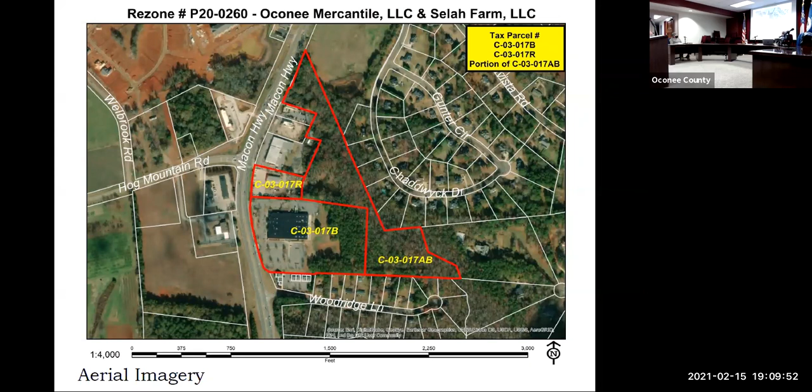Thank you, Mr. Chairman, Commissioners. Your first case this evening is Rezone P20-0260, Oconee Mercantile LLC, Selah Farm LLC. This is located just north of the city of Watkinsville, along 441. This is the aerial that shows the location of the three parcels that are part of the rezone for this evening. You'll notice it's adjacent to Hog Mountain and Macon Highway. It's currently zoned OBP, industrial, and OBP and industrial.

This is the future land use map showing the surrounding land use categories: civic center, in which the majority of this property lies, country estates, and suburban neighborhood. Again, the rezone is to rezone the property from OBP, Office Business Park District, and Industrial District to B2, to construct a multi-use commercial development consisting of retail shops, restaurants, and office space.

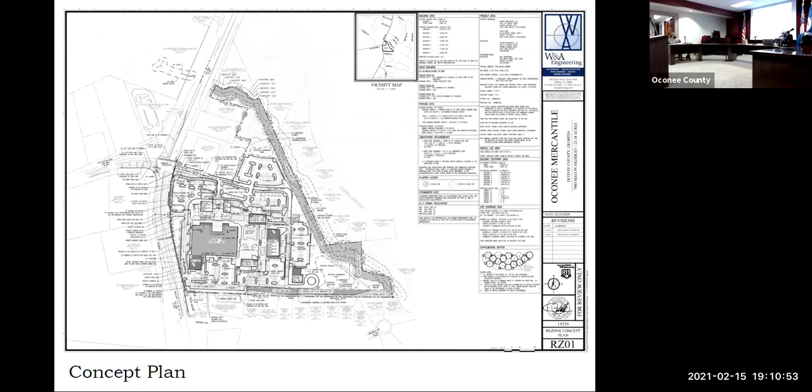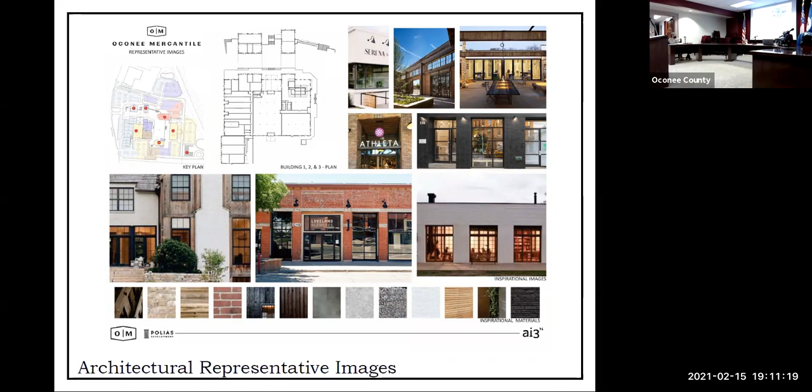A companion rezone, P20-0261, and special use 0263, are requested to allow the existing stone store to relocate to a nearby parcel. You have this concept plan in your packets, showing the overall development on those three parcels. This is a zoomed in slide as well, showing the main building that's existing, future buildings, and the relocation or removal of the stone store, which is located at this location. Again, you have the architectural representative images that have been forwarded to you and posted for the proposed project.

And staff recommends conditional approval of the rezone with the following conditions. 1, 2, and 3 are our standard conditions. We'll jump down to number 4: in order to facilitate pedestrian connectivity with future commercial development, a sidewalk shall be installed in the right-of-way along the subject property's frontage between parcel C03M002 and C03017AB. Number 5, total building square footage on the site shall not exceed 162,508 square feet. Number 6, no delivery truck shall operate on the site, nor dumpster pickup or emptying occur, between the hours of 11 p.m. and 7 a.m. on any day of the week.

Number 7, along the rear property line abutting residential use, all parking areas and drive aisles shall be screened from view by a 10-foot wide planted landscape buffer. Said buffers shall be planted at grade with the parking lot and drive aisles in order to create an opaque screen year-round and shall be 6 feet tall at the time of planting. Number 8, the lift station at the rear of the property shall be screened by an opaque fence and evergreen vegetative screen, to be 6 feet tall at the time of planting.

Thanks, sir. Thank you, guys. Now we'll hear from the petitioner or petitioner's representative.

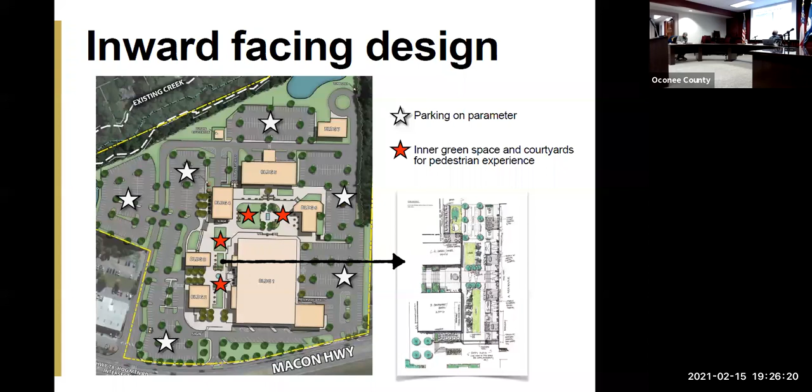Good evening. My name is Scott Haynes. I work for W&A Engineering, and I reside at 2081 Clotfelter Road, Bogart, Georgia, in the county. I wanted to talk a little bit about what's going on there today.

Some of the things that can go on in industrial property are things like carpentry shops and pretty much any type of manufacturing or fabrication work, whether it be metal, wood, or concrete plants, industrial laundry facilities, solid waste collection facilities, things like MRF sites. These things can not only have visual impacts, but they can have noise and smell associated with them. So it's understandable that uses like that, especially for a blanket zoning, should carry a 100-foot buffer.

But that's not the case with what we're proposing. What we're proposing is very specific and is very amenable to residential housing, being that they are amenities that residents will use instead of just live next to. For that reason, we believe the 50-foot buffer and additional screening, as staff has mentioned, is appropriate.

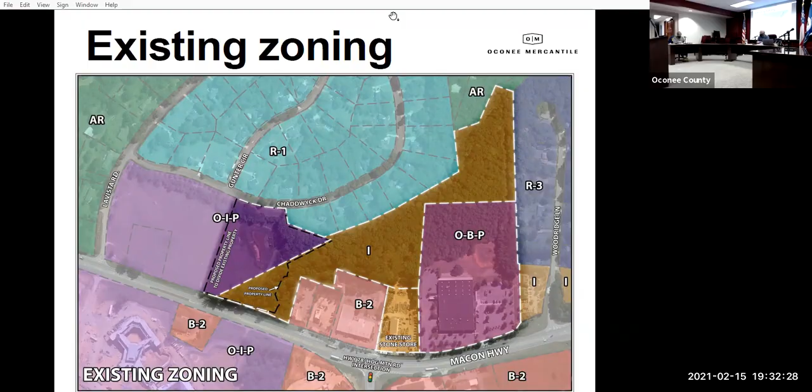All right, that concludes the time we have available for speakers in favor of the proposal. Now, signed up to speak in opposition, first we have Bill Hale. Mr. Hale, will you come up please? Tell us who you are and where you live.

Good evening. I am Bill Hale. I live at 1140 Chaddwyck Drive in Athens. I am the president of the Chaddwyck HOA as well.

I'm going to be speaking tonight on this particular aspect of the rezone. I know there are other neighbors of ours who are going to be speaking on the relocation of the Stone Store at the appropriate time. And I want to reiterate at the beginning that we are not opposed to the project as it is being proposed on 441, at the top of the development.

Because this project—and we are down a hill from this project—we're not opposing what Mr. Mulkey is proposing to put on 441. Our concerns, our opposition to this project, are a result of the very rear of the project and his use of that property, which Mr. Haynes and Mr. Mulkey both talked about as being currently zoned industrial. It's a unique situation here.

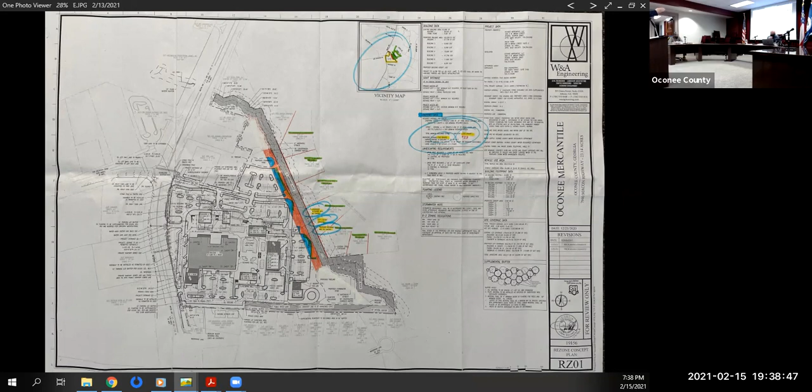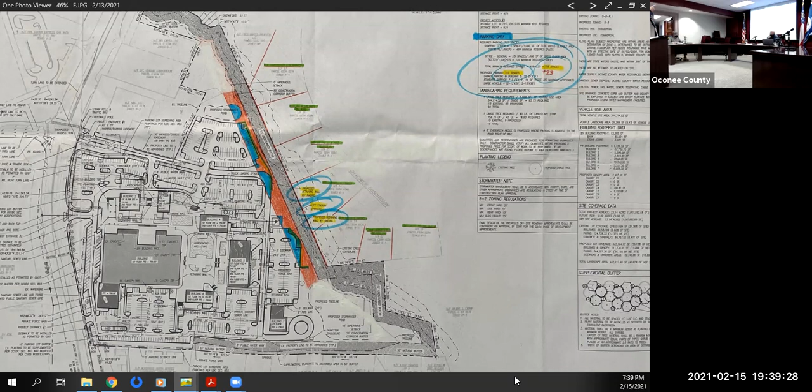Where the 50 feet shaded gray area is—that's the 50-foot proposed buffer that they're talking about. What is in red there is what an extra 50 feet would be. The combined gray and red show what currently exists as a 100-foot buffer. And you can see what is inside that red portion: small corners of parking lots, a small portion of the proposed stormwater pond up at the top, and some drive aisles and retaining walls. There are no buildings—just parking, drive aisles, retaining walls, and small portions of stormwater ponds. That's it.

Even the impact on us with the development of this project to that 100-foot buffer is going to be devastating. I understand there's some benefit to the county for this project being developed, especially up on 441. The reduction of that buffer from 100 feet to 50 feet would be more than devastating—it would be catastrophic for our lives, our quality of life, and our homes back there, especially because of the unique topography and elevation of these sites.

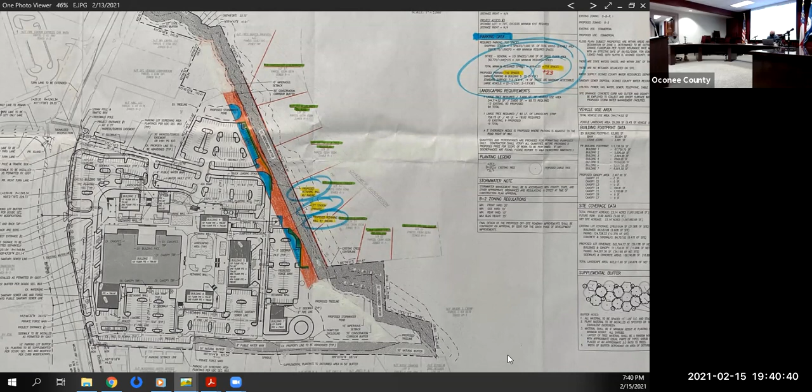So let's zoom in a little closer on this with our exhibit C, I believe, Alex.

If you zoom in even closer, that again shows what we're talking about: a few parking spaces, the corner of a drive aisle, retaining walls. That's what we're talking about. That's it.

The impact on us is tremendous. The impact on the developer to make minor adjustments to this, I do not believe is going to prevent this project from being a very successful project.

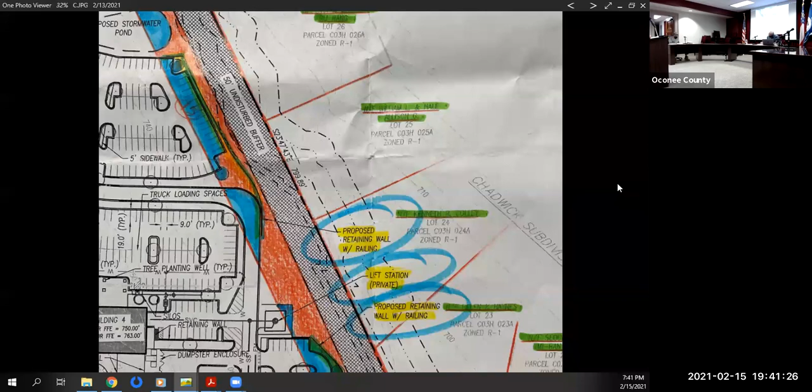Can we go to exhibit D, Alex? This shows the closest buildings, highlighted in yellow on this screen, that are going to be closest to us. The buildings in front of that are buildings that currently exist, like building one, shaded in gray, which is the current Oconee State Bank Operations Center.

Next to it, up at the top, is where the current Stone Store is. I believe the proposal calls for tearing down the existing Stone Store and building the two buildings labeled Building 2 and Building 3 back to back on the Stone Store site. But what you see in this exhibit is a lot of parking, parking that sprawls throughout this development, and that's what is coming back to within 50 feet of our property lines.

The parking on this map is even more than what is required by the Oconee Code. The requirement, according to the planning department, is 719 spaces. This proposal has 742 spaces, which is 23 more than the minimum required by the county.

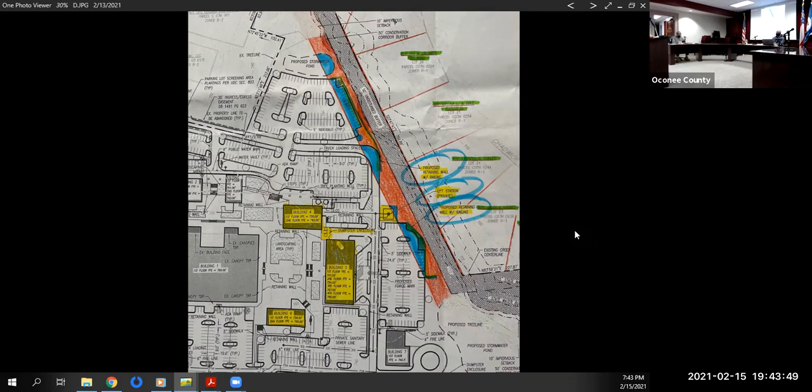I want to read from a report from the Northeast Georgia Regional Commission. I believe it was just added to the staff's site for this rezone over the weekend. One thing I noticed when reviewing this report is that the developer has noted the possibility of converting Building 5, which you see is the closest building to our residences, from offices to a hotel.

I'm just going to leave that there. That was mentioned in the report, that the developer had suggested that could be a potential future use of Building 5, a hotel that close to the property. There was nothing in Mr. Mulkey's presentation or representations to us that indicated a hotel was being considered on this site that would loom over our homes.

What's also very interesting, and I want to quote from this report, has to do with their recommendations about parking. Quoting from page 3 of this report: 'An estimated 78% of the site would be covered in impervious surfaces. Reductions to the proposed impervious surface coverage should be explored. The parking lots create significant low-value areas of impervious surfaces. Stacked parking and a reduction in the total number of parking spaces should be considered.'

That is the recommendation in writing, not from us, but from an objective, independent commission that has evaluated this plan. It makes sense to us because parking is why Mr. Mulkey has indicated he's got to come all the way back to 50 feet rather than the 100 feet that is currently there as a buffer. That is crucial. We're talking about parking.

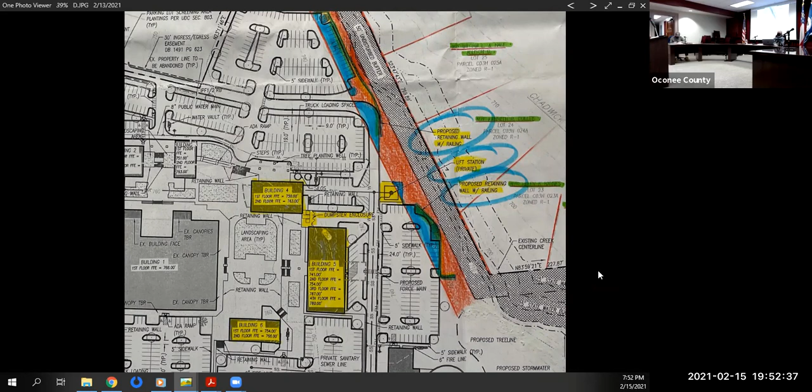Are we out of time? That takes up the 20 minutes that we have available for people speaking in opposition, so I will close the public hearing and return the discussion to the commission.

Brian, do you have any questions, comments? No questions or comments. Were you going to offer any rebuttal time? We have 20 minutes available for each side.

Nathan, do you have any questions or comments? No questions or comments. Scott? No questions or comments at this point. Chuck?

I guess more of a comment. I'm assuming everybody knows that Oconee County has noise ordinances, so after 10 o'clock some of this certainly is going to have to stay on property lines. I'm sure the developer knows that.

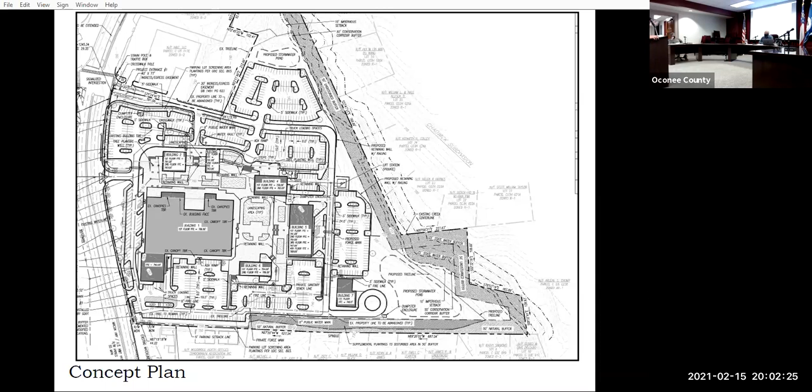Okay, no, thank you, I think that answers my question. Thank you. Thank you. Karen, do you have any other questions or comments? Nope, that's it. Thank you. Okay, Stephen?

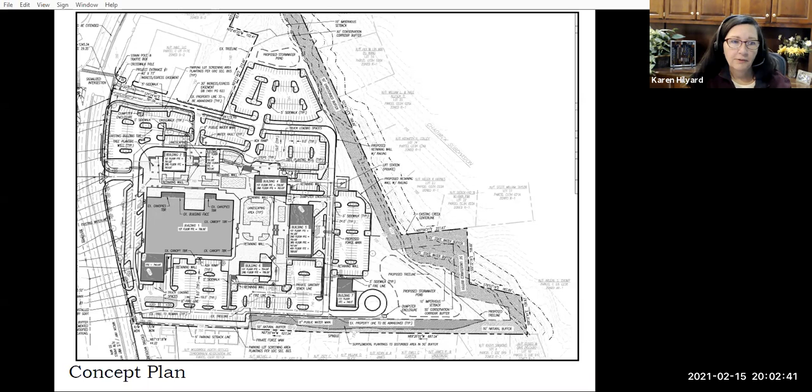Yes, I had one question with regard to the letter and presentation by Mr. Hill and the Chaddwyck HOA. The third additional condition he called out was no outdoor seating within 450 feet of the residential property lines, and effectively no outdoor noise after the hours of 9 p.m. Based on this rezone classification, Mr. Herring, can you confirm that the noise ordinance would go into effect at 11 p.m.? That is correct. Okay, so this request would amend that by 2 hours. Yes, sir. Okay, thank you. That's the only question I have.

All right, Gavin? Gavin, I believe you're muted. How about that? Can you hear me now? Yes. All right, I feel like the Verizon guy.

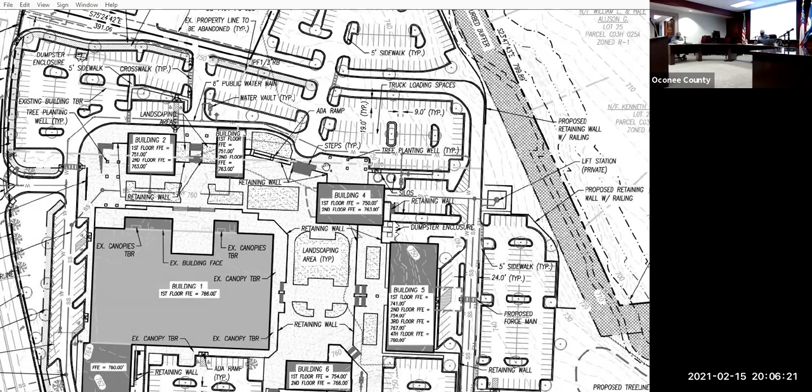Okay, thank you. My other questions are for staff. Guy, if I could. There was some mention about if the 100-foot buffer was required, that there would be the loss of some parking spaces, and Mr. Mulkey indicated that created some cascading issues with building footprint. If the buffer were enforced and the parking spaces that we saw were removed, would it still be possible to meet Oconee County code with the existing building footprints?

We didn't analyze for that, so we would have to look at that and see. I believe the 719 is what's required by the code.

We certainly could look at that and see if that would be an option, and if that would still meet code without those. But as far as what's being proposed, we didn't analyze a reduction in that.

One of the citizen comments today in email raised the question about the fact that this is a phased development, with phase 1 being pretty much ready to go, and phase 2 developing as market conditions dictated. There was a question about whether this could be approved in phases and revisited as market conditions develop. Could you speak to that and let people know how this site plan process works?

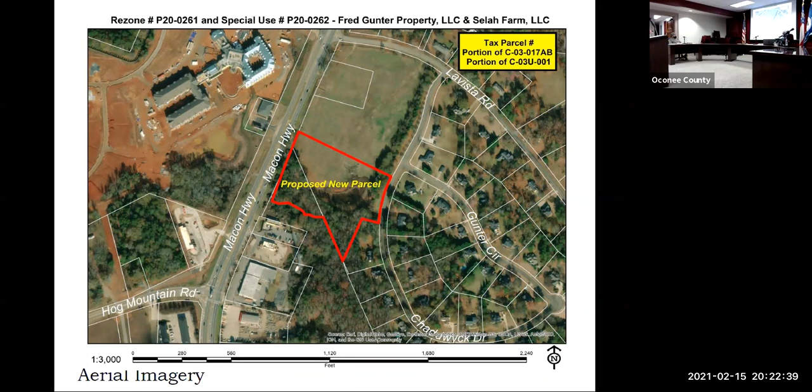Thank you, Mr. Chairman. Commissioners, again, this is P20-0261 and P20-0262, Fred Gunter Property LLC, Selah Farm LLC. This is located just north of Watkinsville on 441. Again, this is the aerial of the proposed layout of the new parcel, taking in parcel C03017AB and a portion of C03U001. One portion is zoned industrial, the other is OIP, and you can see the surrounding zonings.

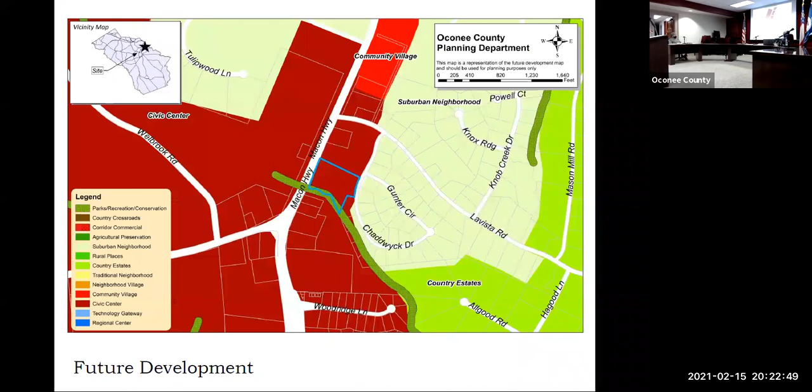Again, this is in Civic Center character area, adjacent to suburban neighborhood. The rezone request is to rezone the property from OIP and I to B2 in order to construct a new location for the stone store. A special use, the applicant is requesting special use approval for outdoor storage associated with the stone store. And of course, you just heard the separate rezone of 260.

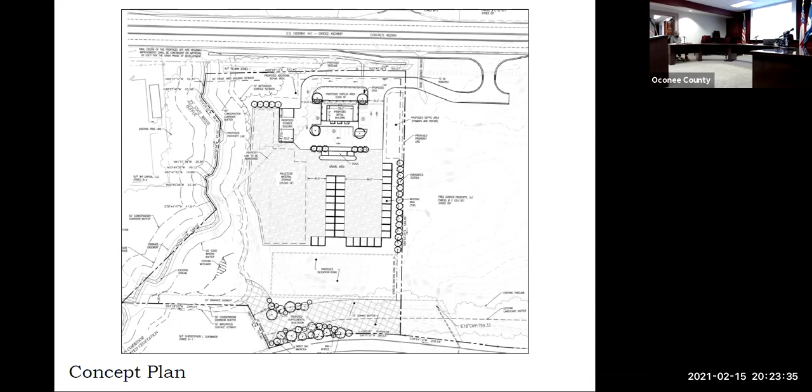And the staff recommends conditional approval of P20-0261 with the 3 standard conditions, and number 4, no delivery truck shall operate on the site, nor dumpster pickup or emptying occur between the hours of 11 and 7 on any day of the week. And number 5, no outdoor sound amplification shall occur on the site. And again, the special use P20-0262, staff recommends conditional approval of the special use request with the same conditions.

Thank you, guys. Now we'll hear from the applicant or the applicant's agent. Thank you, Mr. Chair. My name is Scott Haynes. I work for W&A Engineering, the applicant's agent on this application. I reside at 2081 Clot-Belcher Road, Bogart, Georgia, in Oconee County. I'd like to start by clarifying some confusion from the last application regarding this action on the Gunter tract.

To clarify, we are only asking for less than a third of that property to be considered under this rezone. My client does not own the Gunter tract. He is purchasing that portion that is in the subject rezone, and no other property outside of that part of Gunter that will remain under ownership of someone else. That property is to be developed outside of what we're proposing here, in a manner that's a private matter between the property owner retaining that and some future developer.

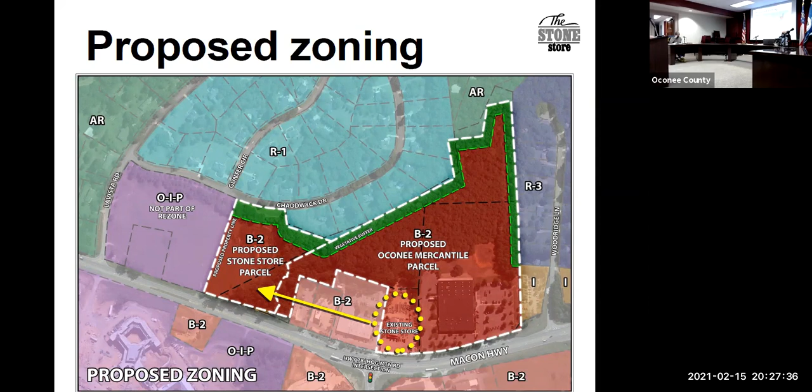What we're proposing is to put that area in the front of the building. As you can see on this plan, we've got a proposed display area. So we want to bring that part forward and let it be the foreground for an attractive building. The architecture for this building has been enhanced from what you see today.

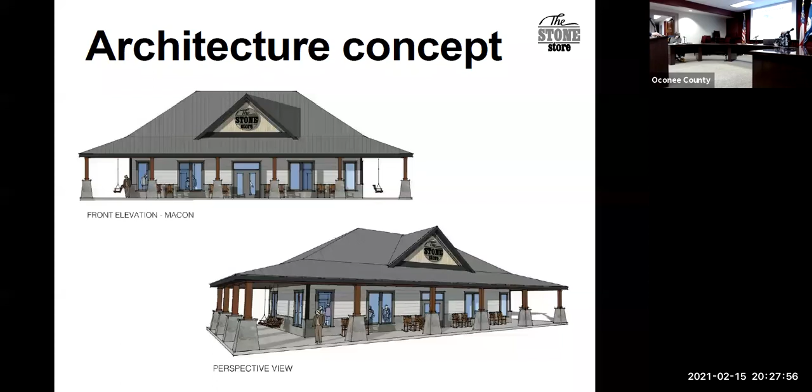In addition, we're taking the less sightly uses that occur on sites like this and trying to push them back some. For instance, the parking is now no longer in the front of the building. We're moving it to the sides and the rear of the building. And of course, the material bins and palletized material yard will be pushed all the way in the back of the building, and we'd use screening in the building itself to help additionally block that view from the right of way.

You can see there's several areas on this plan that there is called for evergreen material that would help screen it from the sides and the front, as an addition to the rear against Chaddwyck Drive, and we'll get there in just a second.

All of this helps take what is currently at the intersection of 53 and raise it to a higher level, allowing that site to transform into something also to a higher level.

Now, we understand there are concerns about this proposal. We've spent the last several days pouring through emails and questions and letters. It seems like many of those letters were written in confusion about the idea that we were looking to rezone the entire Gunter property. And obviously that is not the case. We hope that clears up many concerns, as we have already seen has happened with several residents who have expressed that opinion.

We have provided additional buffer in the rear of the property. We're required to do 50 feet, but we are proposing 75. We are also putting the detention pond in between that buffer and the back of the stone store material area to provide additional separation from Chaddwyck Drive to the action sites of this site.

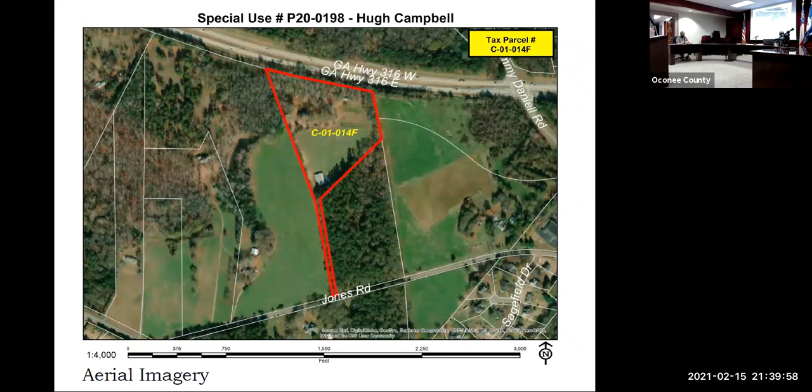All right, thank you. Next item on the agenda is special use P20-0198, Hugh Campbell. Thank you, Mr. Chairman. Commissioners, you have before you again this evening P20-0198, Hugh Campbell. This is located off of Jones Road along 316. The subject property is shown here in the aerial. It's currently zoned AG, and it is located in the regional center character area. The applicant is requesting special use approval to erect a 250-foot wireless telecommunications tower.

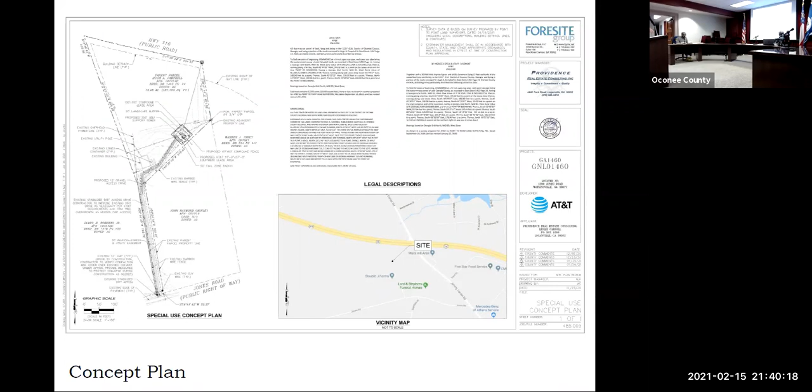Thank you. And now we'll hear from the petitioner or the petitioner's representative, please. Hi, I'm Leslie Carroll, 3510 East Monroe Road in Loganville, and I'm representing AT&T tonight.

We are asking for approval of a 250-foot self-support style tower. However, I see that the staff recommendation is for a monopole not to exceed 199 feet, which is acceptable for our RF mapping that was provided. We have engaged in a lease for a 100 by 100 leased area. We will fence in 80 by 80. The reason for the request for the additional height is for additional co-locators in the future, so that they will have that additional height to put their equipment. At this point, we're dropping it down, so their highest height would be around 180 for the next person to go along.